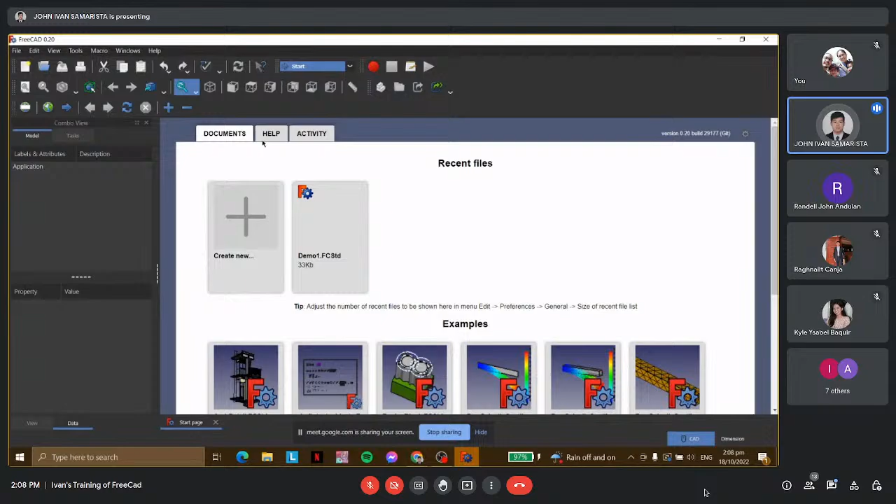So now, before we start designing 3D models in this software, we need to click this button, Create New. Again, click Create New. And since most of the time you will be dealing with designing objects, you need to select Part Design. But before diving into the details of Part Design, you need to know first the basic user interface of this 3D modeling software.

So the very first thing that you need to check upon opening FreeCAD is the workbench. As you can see here, there's a lot of things that you can do here, such as Draft, Drawing, Image, Part Design, Part Sketcher, TechDraw for your technical drawings, and many more. Most of the time you will be dealing with Part Design. Here in the workbench, we can select the active workbench that we will be using.

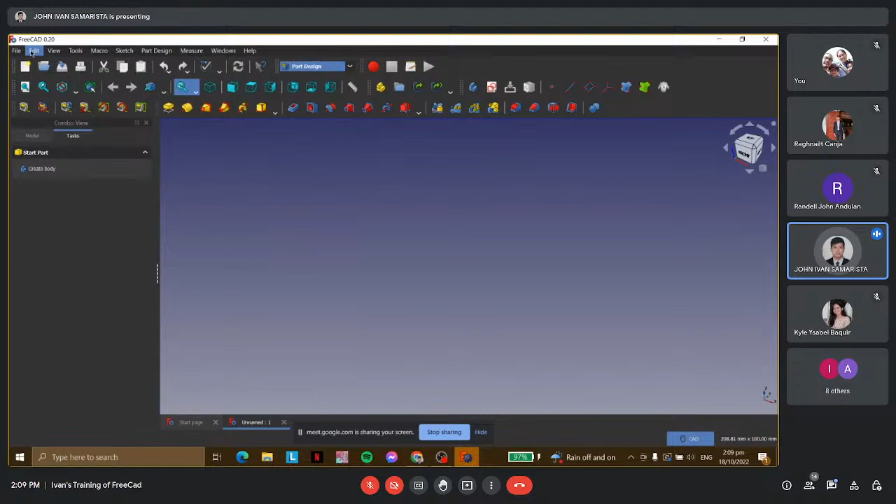So after the workbench, as you can see here, the very first part of the interface is the standard menu. Basically you can see here the File, the Edit, the View, and the Tools. So after the standard menu, we can see here...

Upon clicking this model, you can see here, this is the Combo View. Based on experience, Combo View is one of the most important parts of FreeCAD's interface because it really gives good guidance when you're designing an object. This is also known as the Tree View, which shows the hierarchy and construction history of objects in the document. Later you will see the hierarchy of the objects and their construction.

And next is the Property View. Here you can manually edit the tools that you utilize for an object. So in order for you to understand this Combo View better, I guess we need to sketch a very basic object.

So let's say I'm going to sketch a rectangle. We need to click first the Close and we need to Pad it. So now you can see here, as I've said earlier, the Combo View shows the hierarchy and construction history of an object.

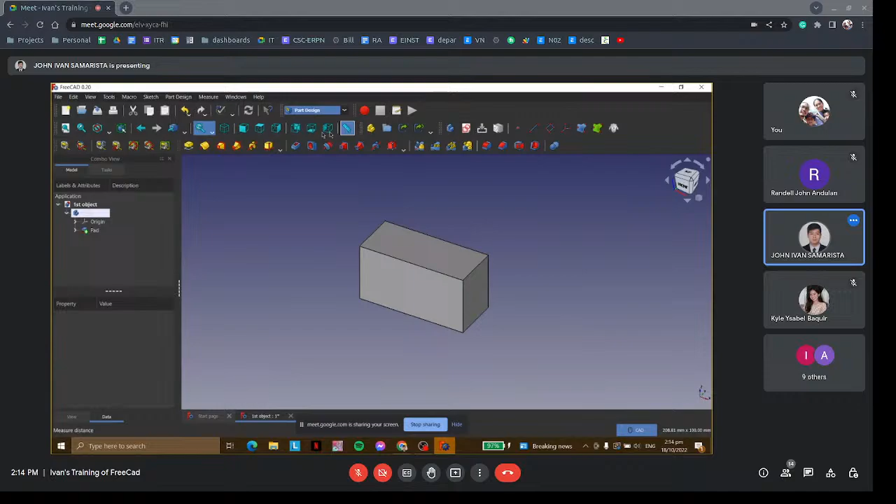But there's an alternative to that. You can go here to workbench and select one. Next is the toolbars. If you want to customize the toolbar, you just need to press this toolbar and check or uncheck the parts that you wanted to use. So let's say if you uncheck the structure, it vanishes.

If you want to get it back, just click it again. If you accidentally closed the combo view, let's say you click it accidentally, you just need to go to view again, then go to panels, and then select combo view.

Okay, so now after knowing those parts, we will be dealing with the navigation of FreeCAD. In terms of navigation, that means how do we rotate, pan, or zoom in and zoom out the object.

For you to know that, you just need to hover your mouse on this one, the CAD, and you can see the CAD navigation styles. In selecting a side of an object, you just need to use the left mouse button, and then for zoom, just scroll up and down.

For the rotate, you need to press first the middle mouse button, and you can select either of the two mouse buttons. And then for the pan, just click the middle mouse button. Again, for selecting, just select a side with the left mouse button. For zooming, just scroll up and down.

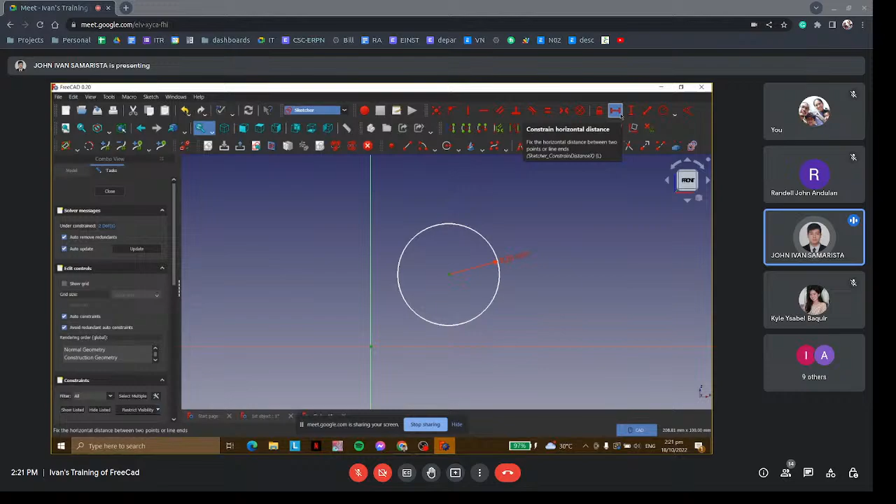So I can set a distance of, let's say, 30. Now we only have 1 degree of freedom. If we try to move the circle sideways, it can't be moved anymore. The only movement left is just up or down.

So the very last thing we need to do here is set a constrained vertical distance. It's basically the same thing as the constrained horizontal distance. You just need to click 2 points and then click this one, constrained vertical distance. Click these 2 points and then click the constrained vertical distance. Let's say we want this to be 30 as well.

As you can observe, the sketch turned into green. If your sketch turns green, that means it's already fully constrained.

Under the constraints here in the task, under the combo view, you can also see the constraints that we used. The very first thing we did was constrain the circle based on its radius. The second thing is we set a horizontal distance constraint, and the last one we used was the vertical distance constraint.

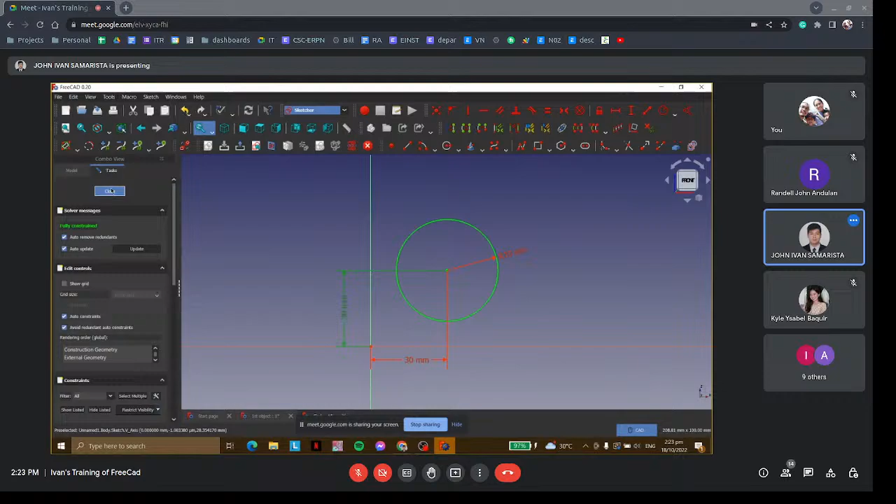Okay, so let's say you're done sketching. From here you can do anything, like you can press the Pad. Pad is just the extrude, like in SolidWorks, this is the extrude.

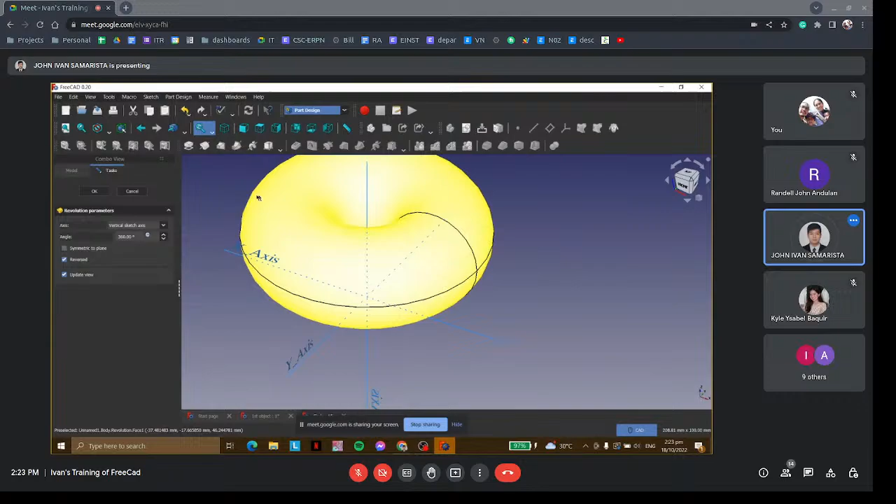And then you can also use this one, the revolution, which revolves around an axis. You can choose, let's say, the base x-axis, and then let's say we want this to be just 180 degrees. Let's say reverse. Okay.

So in this case, we'll just need to use the pad. And then okay.

So after dealing with circles, the next thing we will discuss is how to use lines. We create a new object again: create body, then click create sketch. We can choose any of these three predefined planes based on our object. In this case, I'm going to choose the XZ plane. For the line, we just need to use this tool, create line.

As you can see under the solver messages, the line is under constrained with 4 degrees of freedom. That means this point can move in two different ways - you can move it up or down, or sideways. And this point, the same thing, can also move up or sideways.

So in order to fully constrain this, the first thing we need to do is consider this origin point because we need to lock this first point. To do that, we select these 2 points, and then use this tool, constraint coincident - it creates a coincident constraint on the selected item. If I click this, the 2 points lock.

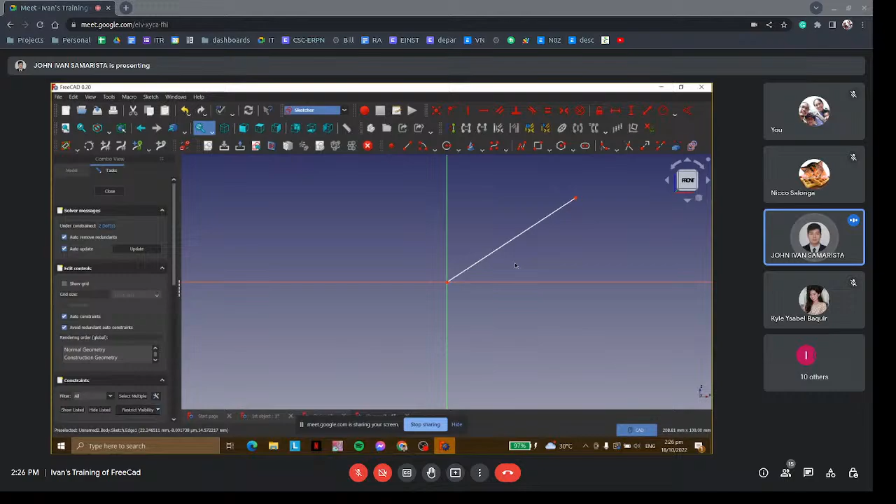So we have 2 degrees of freedom left. You can move this point like this. How do we remove the two remaining DOFs? Since we can move this up in vertical direction, we can set an angle between this line and this axis.

In order to do that, we select these two lines - press Control, the first line and our reference axis, this one. Then we click constrain angle. In this case, let's say we want 35 degrees.

As you can see, there's only 1 degree of freedom left. If we try to move this line, we can only move it in this way, because it's already locked at 35 degrees.

Since there's 1 degree of freedom left, what do we need to do for this to be fully constrained? Since we're able to move this like this, it's imperative for us to lock the dimension of this line. We use this constraint distance, which fixes the length of a line or the distance between a line and a vertex.

So we use constraint distance, select this line, and let's say we want 60 millimeters. As you can see, it's already fully constrained. Again, we can see here the three constraints we used: the coincident, the angle, and the distance constraint.

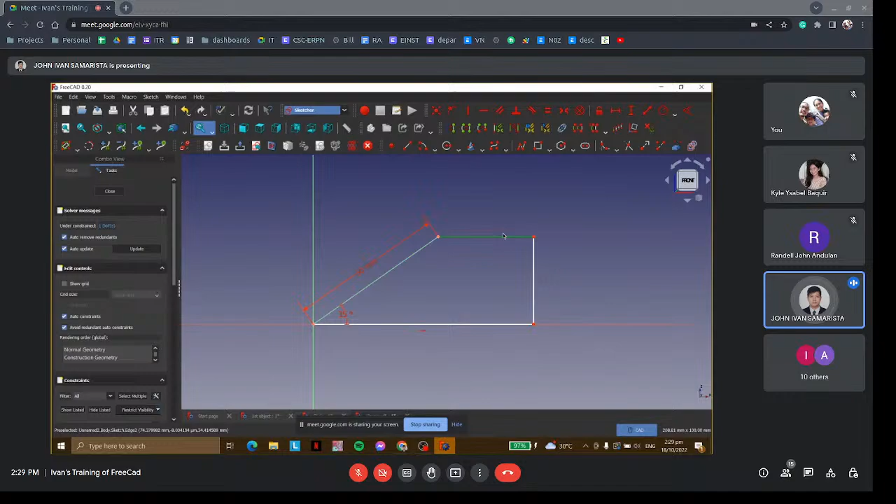In order to lock this, we need to specify a constraint distance for this line. We select constraint distance, and let's say we want a 40 millimeter length. As you can see, it's already fully constrained - if you move this sideways, it's locked at 40 millimeters, so you can't move the bottom line anymore.

If you're done sketching, just close, and then you can use whatever tools to pad this. We need to label this as the line. Now we're done with the lines.

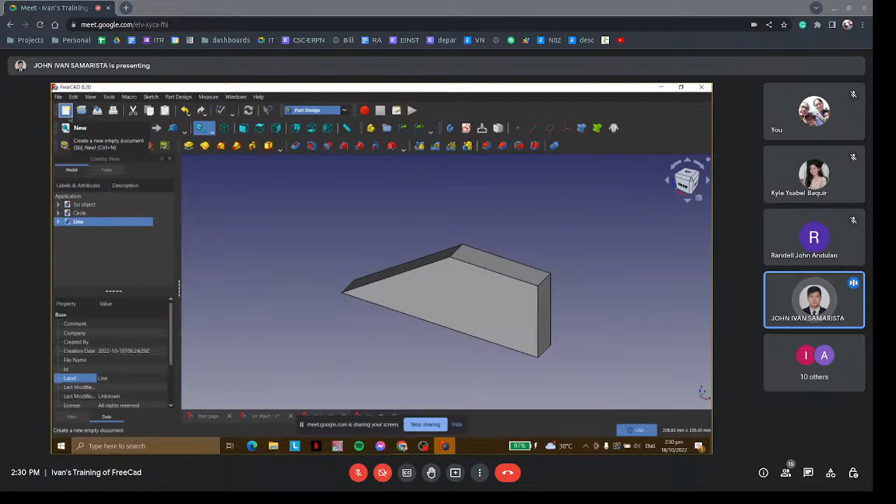So let's go to rectangles. Again, we need to create a new file. We just select new, and under that select create body, and then same process, we create sketch.

Now for this one, I'll be selecting the XY plane. Again, it depends on your preference, or it depends on your object. So let's say we have a rectangle here.

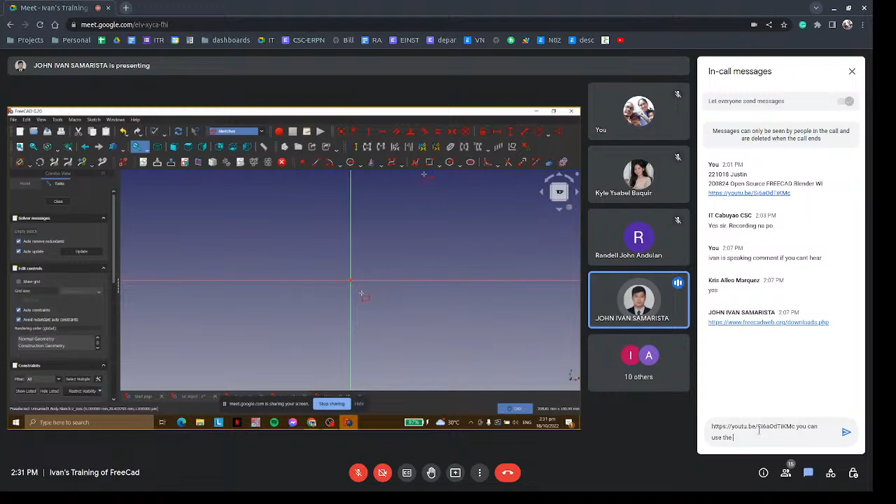As you can observe, the theoretical center of this rectangle and the origin are not coincident. So another constraint we can use is the constraint symmetrical.

So in this case, the constraint symmetrical, as stated, creates a symmetry constraint between two points with respect to a line or a third point. In this case, we will be utilizing the third point.

We just need to select first the two points, this one and then this one. Our third point, or reference point, is the origin. If we click this, the constraint symmetrical, now the center of the rectangle is already coincident with the origin.

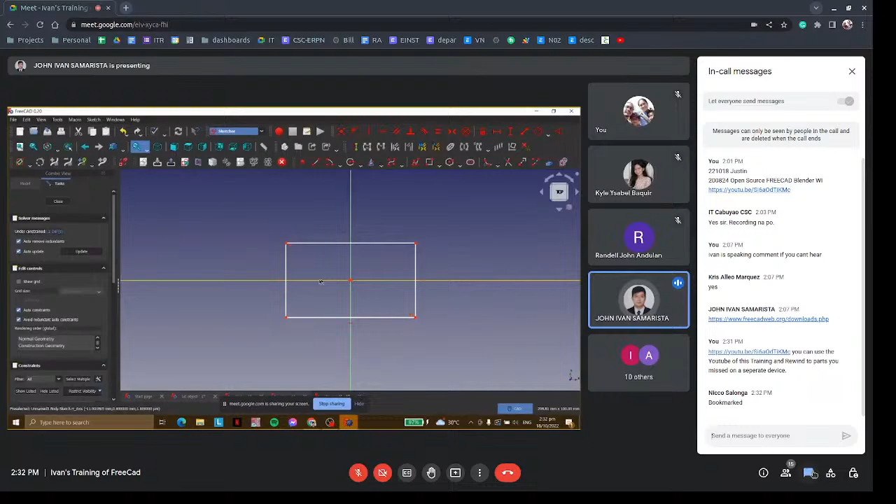Now as you can see, this rectangle has 2 degrees of freedom, so it's really up to you. If you just need a rectangle, you can basically close the sketch. But if you want this to be fully constrained, like transformed into a square, we need to fully constrain this.

As you can see, we can move this vertically and sideways. So in order for us to eliminate the degrees of freedom, we can select two lines.

After selecting two lines, we can use the constraint equal. This is also an important constraint because it creates an equality constraint between two lines, or between circles and arcs. If I click this, these two lines that I've selected now share the same length.

That applies to the remaining lines as well. As you can see, it's now only under-constrained with 1 degree of freedom. That's the overall size of our square.

For us to fully remove the degrees of freedom here, we just need to specify a distance or dimension. Let's say we want this to be 60. Then that's it, it's already fully constrained since it turned into green.

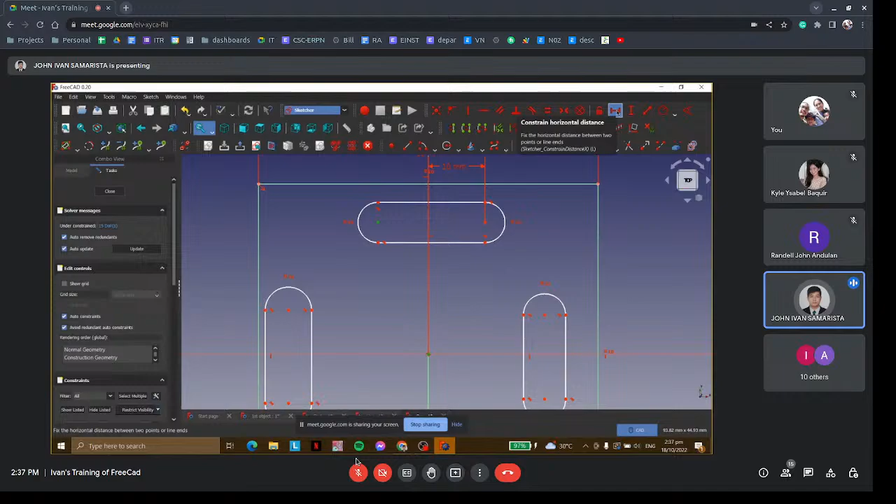If I select these two points and then select the constraint horizontal distance, let's say we want this to be 10 millimeters, so it's already constrained at 10 millimeters. It becomes 15. On the other side, we also want this to be 10 millimeters, so we just click again the constraint horizontal distance and set it to 10 millimeters.

Next, we need to set a constraint vertical distance. You can select any of these two points with reference to the origin. We just click this one and this one, and set a vertical distance of, let's say, 25.

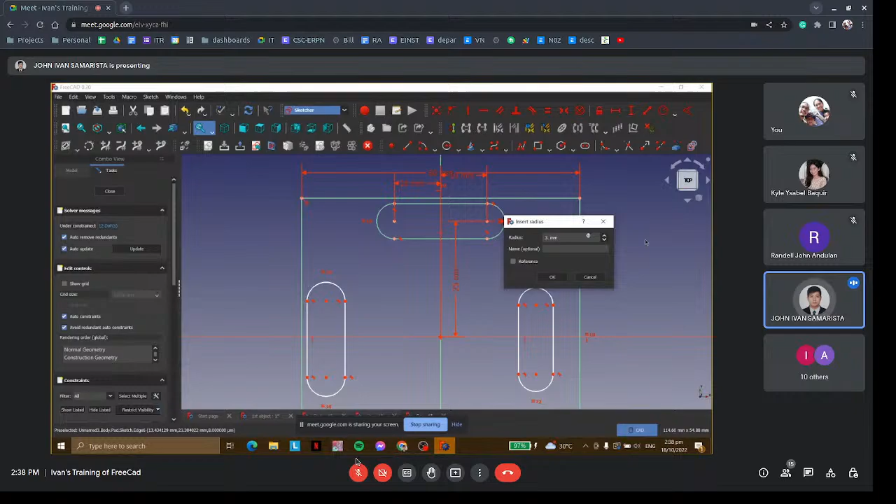Okay, lastly we need to constrain the radius. As you can observe, the movement of this slot is just based on the radius, so we can't move this vertically or sideways anymore. We just need to constrain the radius with 3.5 millimeters. Okay, and then it turned green, meaning this slot is already fully constrained.

So let's apply each step we've done here to each of the slots. We need to click this one and then this one, and set a horizontal distance constraint again with a length of 25. Then we need to constrain it vertically based on the origin with a length of 10, and on the other side it's also 10.

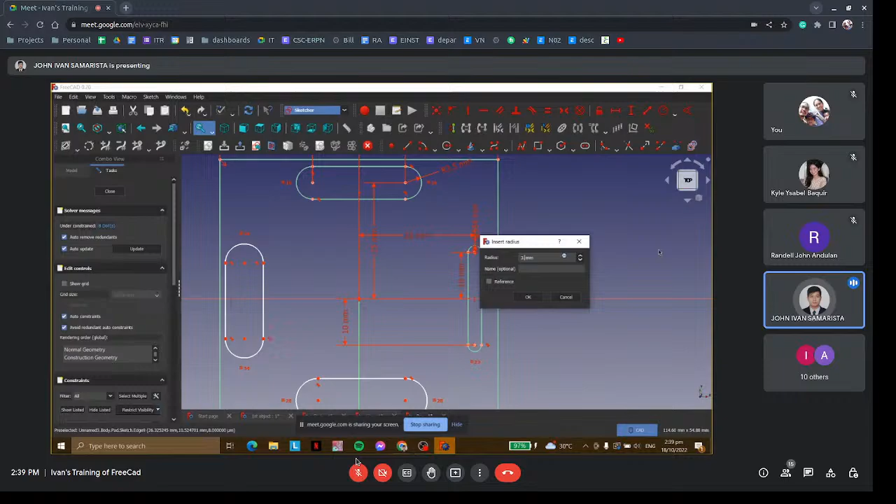Lastly, for the radius, we just need to make this 3.5 millimeters. Okay, for the last two, now we have 8 degrees of freedom left. Same thing: set a horizontal distance of 10, and on the other side it's 10 as well. Next, we need to constrain it vertically. Again, you can select any of these 2 points. We want this to be 25. Then lastly, we need to adjust the radius to 3.5 millimeters.

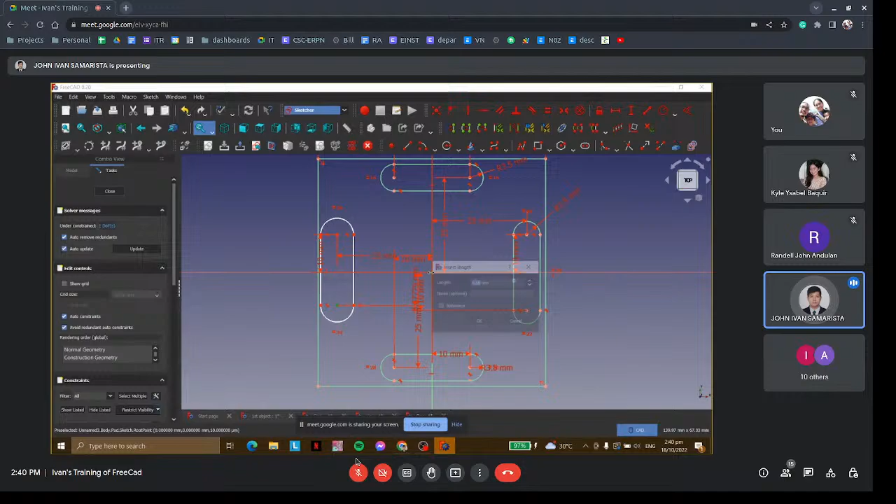Now we have 4 degrees of freedom left, so same process. We can constrain this horizontally, 25. We can constrain it vertically with 10 millimeters, and this one also 10 millimeters. Then constrain the radius of 3.5.

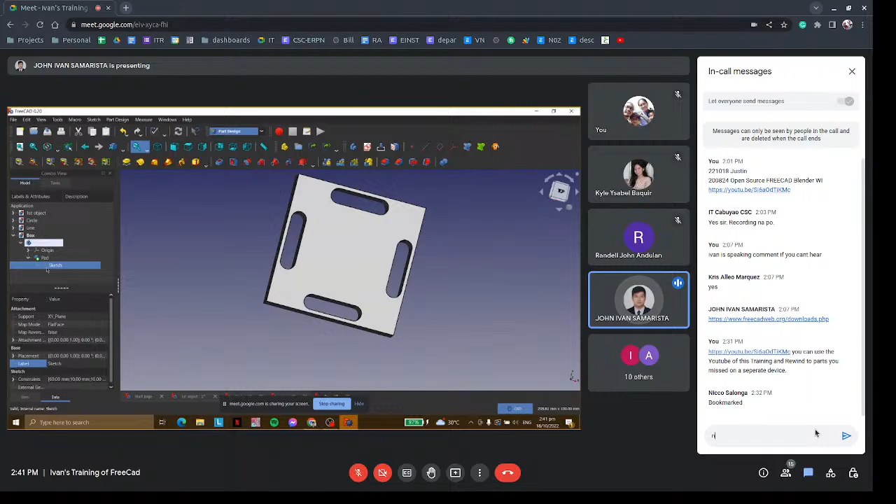Now it's quite apparent that the whole sketch is already fully constrained, so we can close this. We've already padded this earlier, so it's already our object. In case you want to add additional elements to your sketch, you just need to go into the combo view and double click this one. Let's say we want to add a hexagon here.

You can see from the sketch that this hexagon has 2 degrees of freedom. Those 2 degrees of freedom would be its rotation, meaning it's not yet fixed, and its diameter. So we can lock this based on our preferred design. In this case, we want this line to be horizontally constrained, so now we have 1 degree of freedom left.

Then we can adjust the size by using the constraint radius again. Let's say we want a radius of 10. Then close.

Okay, in case you want to add more elements, let's say you want to fillet or chamfer the corners, you just need to select. You can do this two ways: first, select all the sides you want and then click the tool, or you can click one side. Let's say you want this to be a fillet, and then we can add more sides. This one again, I'm pressing Control and selecting all of the sides, and then this one, and we want this to be, let's say, 8 millimeters.

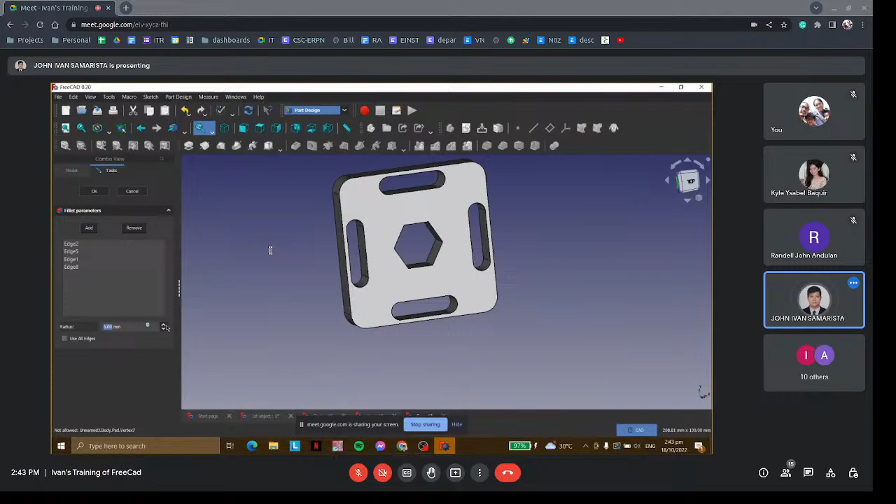Okay, so that's basically it for this exercise.

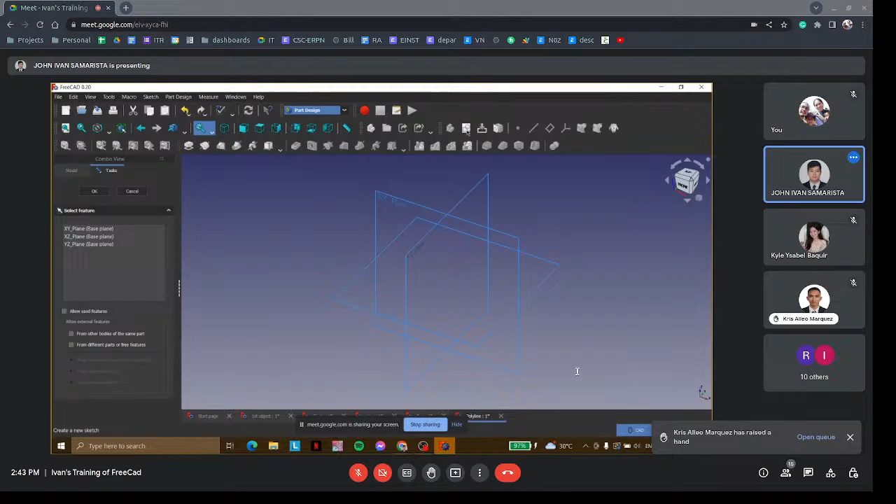So the last thing I want to discuss in the basic sketch of FreeCAD is the polylines. Again, we need to create a new file. We need to label this with polyline, then create a body, and then create a sketch. In this case, I will be choosing the XZ plane.

We can use polyline if we want. Using polyline is far better than using the create line tool, because with polyline we can work faster, and we can also use it if we're dealing with objects with variable shapes. It creates a polyline in the sketch, and we press the M key to change the cycle behavior. So we need to select this one and then create a series of lines.

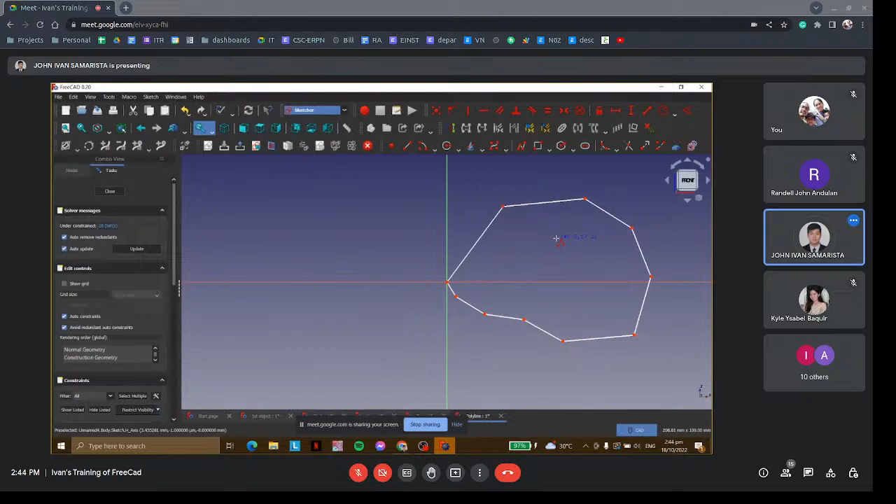It really depends on the object we're working on. Let me delete this one first. Again, there's a shortcut here: it says we need to press M to change the line behavior.

Let's try to make something out of this polyline. So we need to create a line again, and if I press M for the first time, it changes. M for the second time, changes again. M for the third time becomes an arc. So in this case, I'll be using an arc.

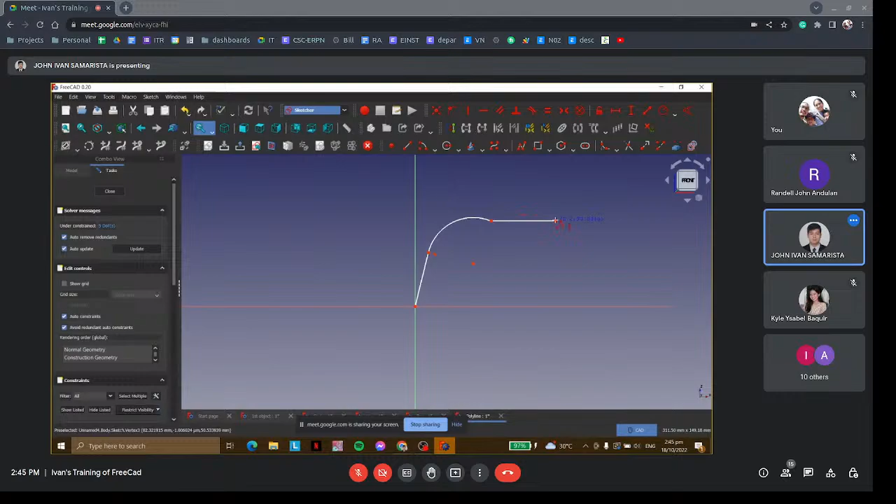Then I want a horizontal line here, and let's say I want another arc again, so I need to press M 3 times. Okay, this is another arc. Then I want another arc, so we press M again 3 times.

Then we want another arc again, we press M three times again. Okay, and then let's say we want just a simple line. And then we want another arc. And then lastly, we close this with an arc as well. So let's say here's our object.

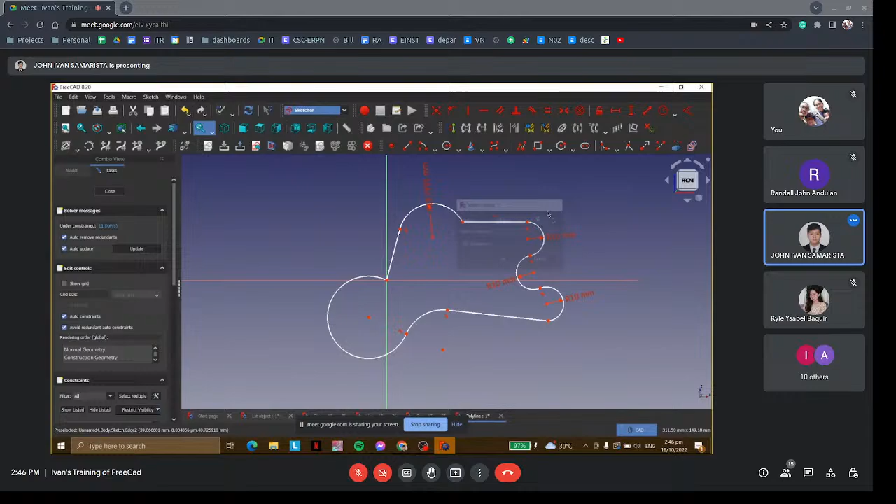So it's really up to you if we want to remove all of the constraints. It really depends on the object that you're working on. So here, let's say we want to adjust the radius. We want this to be 10. We want this to be 10 as well. 10. We want this to be 10.

So after that, we can apply the other constraints that we've discussed a while ago. In case you want this line to be vertically constrained, you just need to click this one and then use this constraint vertical. Let's say if you want this line to be horizontally constrained, you just need to click this one to constrain horizontal. And then FreeCAD will automatically adjust based on the constraints that you've already set.

So yeah, that's pretty much it for this exercise, for this lesson.

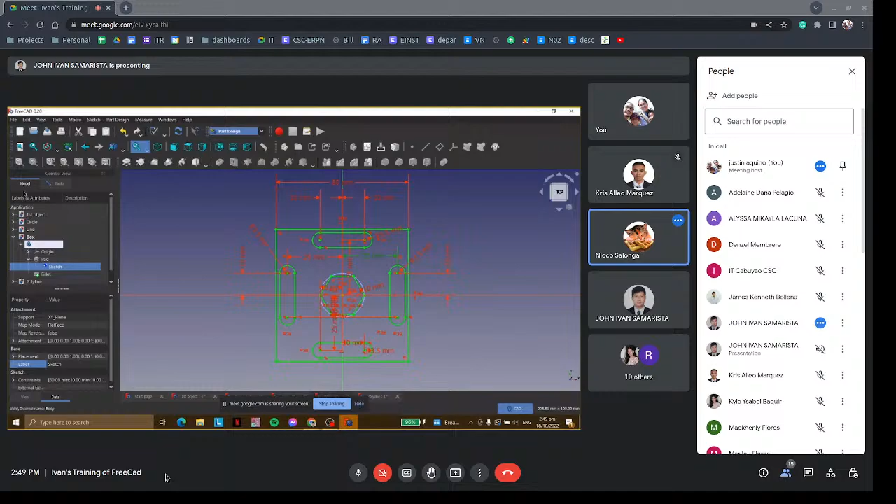In the model, I think, model. Combo view, model. Upper left in the model part. Okay, if in your model view, the, where's that? Upper left. The model tab. Okay, line labels and attributes. But there's above that, there's model, and tasks. Oh yeah, that's the one, right? Yeah.

And you're in the sketch mode. Are you in the sketch mode? Yeah, he's in sketch mode. Yes sir, naka-red kasi eh. Naka-red at green, sketch mode. You should see the, okay. Go into the part where you can draw again.

You'll see the sketch has the constraints listed on the left. Oh, the task sir, this one. Yeah, yeah, yeah, there, dun pala sa tasks. Yeah, you can actually unclick those. They'll just be hidden, yung check mark to the left. Yeah. Oh yes sir. Okay, I remember now, parang di, I mean, if it's just too cluttered.

Tapos, there's a way to link, like, di ba, measurements to each other. Yes sir, para the same na lang siya. You don't have to anymore keep re-encoding. Is that an array function, or is that something else you can do within? It's not the same as array. Array would still be better, but basically, if you change one measurement sa isa, lahat sila magbabago because they're using the same, let's say, length of line.

You can set it up there. Yeah, you can link constraints. Sige, it's a type of constraint. Where's that? No, it's in the constraints. It's a type, it has to be already built in when you make the constraints. So you go to the constraints. Can you right click on it for more options?

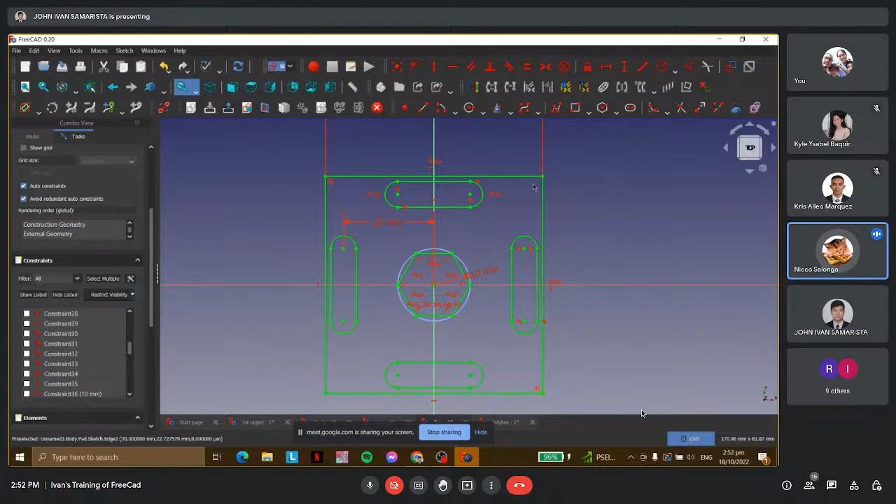So you can hide them all. Sorry, first you constrain them so that they're linked. Then you hide them, 'cause that way it's not messy. You won't, the only thing that remains are your main control constraints. Because if you change this constraint, it will affect all the other constraints anyway. And since you set it up properly, yeah, if you set it up properly, and since it's hidden, it won't be visually confusing. Mhm, okay.

If you're using a lot of the same shape and they're not going to be different from each other, it might be good to use the equal constraint. We can try that on the next session.

Ivan, just save this file, and then on the next session on Friday we can have a demonstration of the equal constraint.

It doesn't have to be now. You have an exercise prepared, right? Yes sir, wait, I kind of dropped off. Did you demonstrate how to import an image, the floor plans? That's on the next session, sir. Okay, okay, sure.

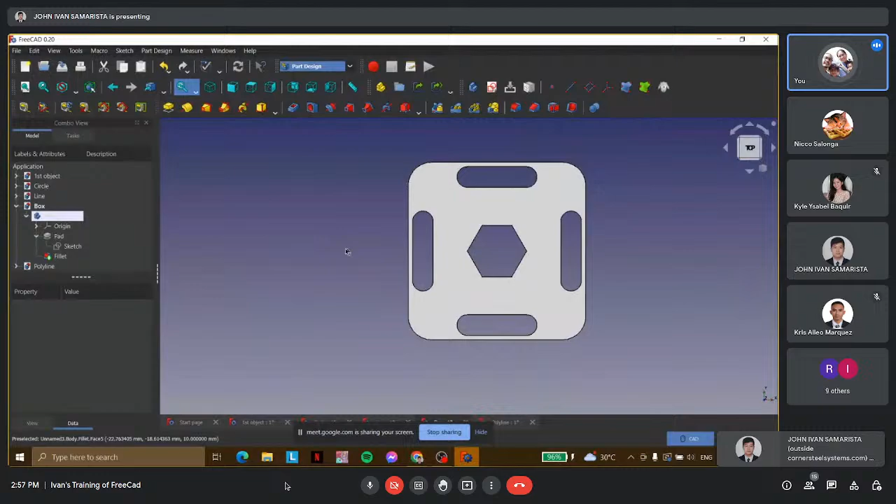Can someone volunteer to share their screen and replicate this? For this one, the dimensions don't have to be exact as long as the appearance looks the same. The very important thing is that you apply all the constraints.

Ivan, I think this is a good idea. Would someone volunteer to show their screen and do it part of the way, like constrain one corner? There's four corners.

So one person can do it up to that corner, and then the next person can share their screen and show the other corners until you have four or so, so that way you don't wait for us. One guy already did it up to this point, the other person already did that and proceeded to the second set of constraints, another is on the third set, and the other is into the fourth set.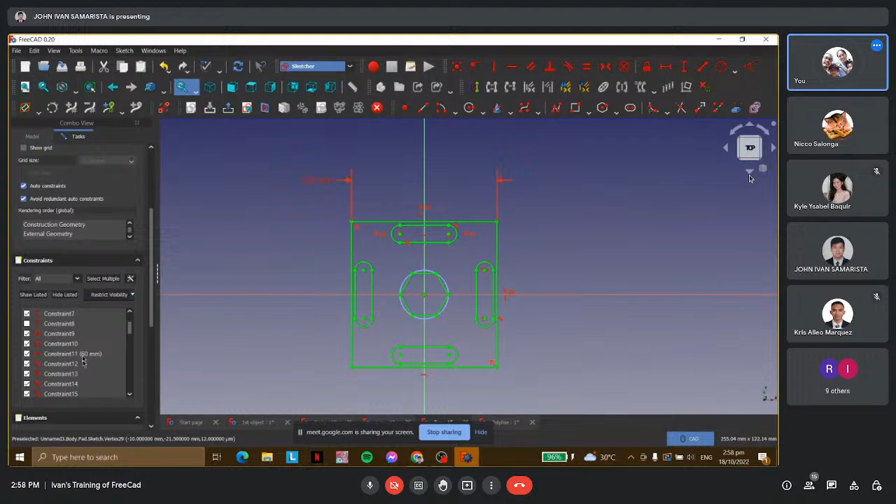And of course, the final one being the hexagon. Thus you have demonstrated everybody has understood the concept. Is that okay? Okay sir.

Who'll volunteer to be first? The advantage of being first is that we're here to walk you through, or Ivan's here to walk you through. If you forgot something, there's people to walk you through.

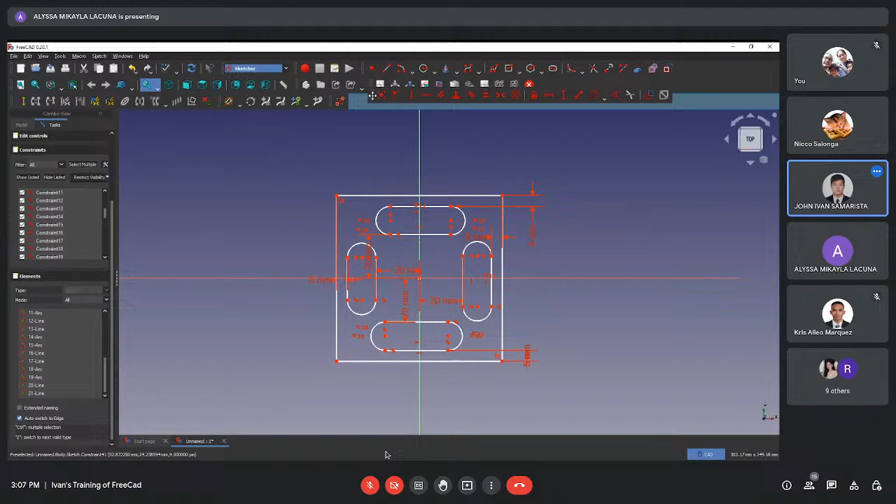You want to find the radius? You just need to move that somewhere else. Which one? That one, that one, this one, you can transfer that there. Then you can use the constraint radius or diameter.

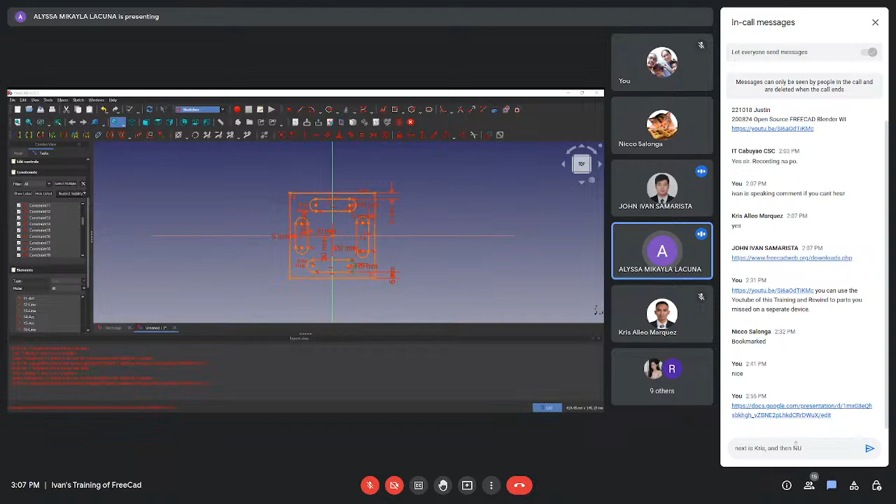So they're all 5 now. Yeah, like, I think it defaulted to 5 earlier, so I'll try to make it 6 instead. Never mind.

I guess the next thing would be its horizontal distance, like between the two center points of the circles, this one and this one.

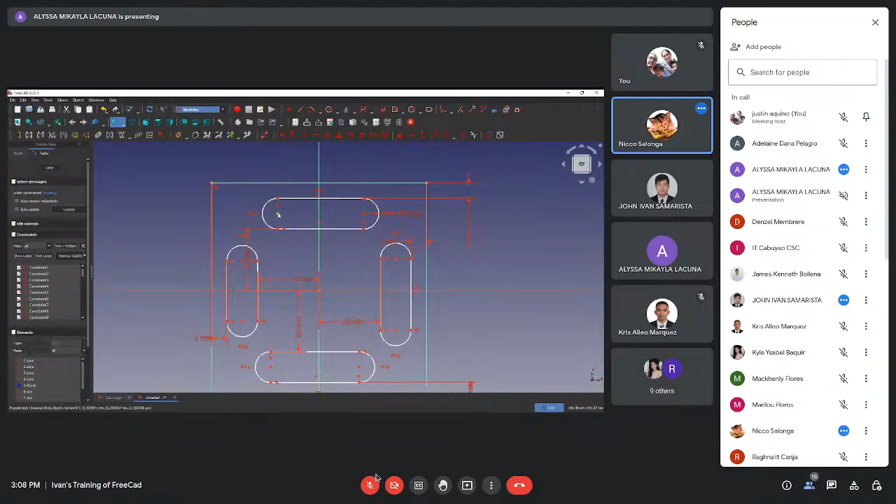Use this one first, then you can reference it to the origin, then use the horizontal constraint. Select that one and the origin, then select the horizontal constraint, that one. Then make sure both sides have the same length. Then the process is pretty much the same for the rest.

Yeah, that's fully constrained already. So you can add whatever you like in the middle.

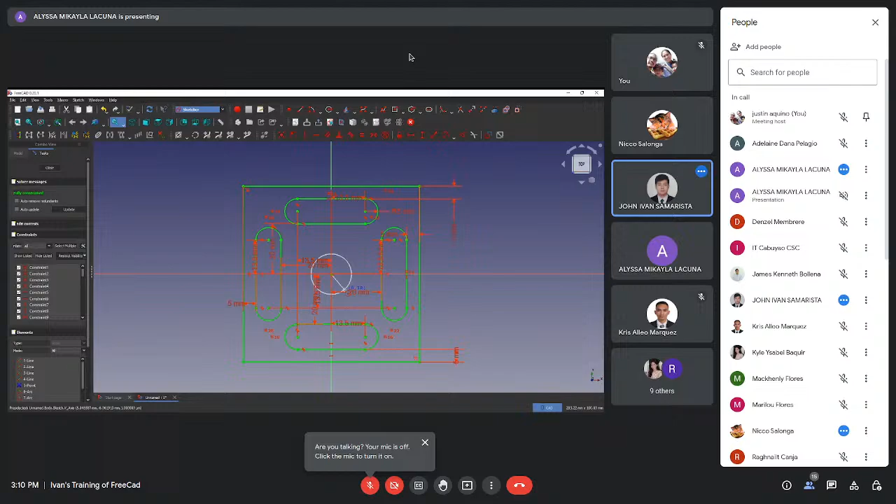And then if you're done sketching, you can just click close and then you can add it. And then, yeah, that's it.

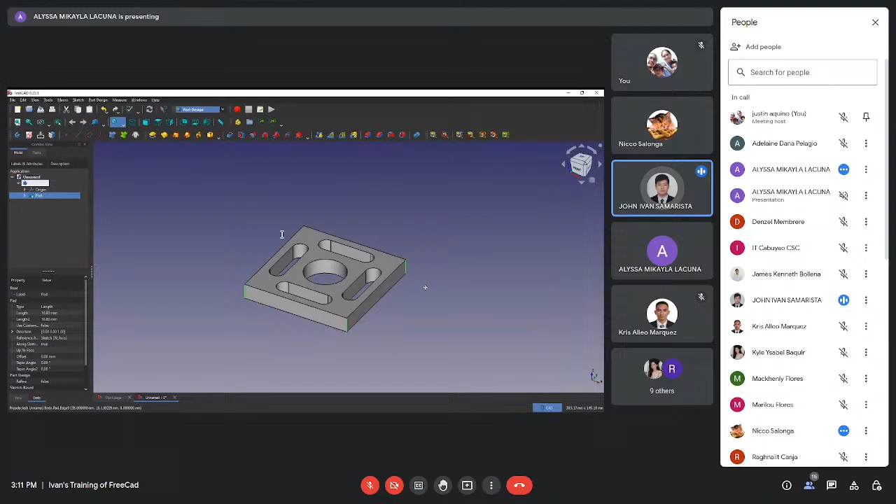Sir? I think... Okay, try it. I'll stop sharing now, sir. Okay, fine. Thank you. Thank you, Alyssa. Thank you. Sir, wait, just setting up.

Hello sir, I guess for the second exercise, I think it would be better if it's take home. They can utilize polylines and create any object that they want, and then they can present it next meeting.

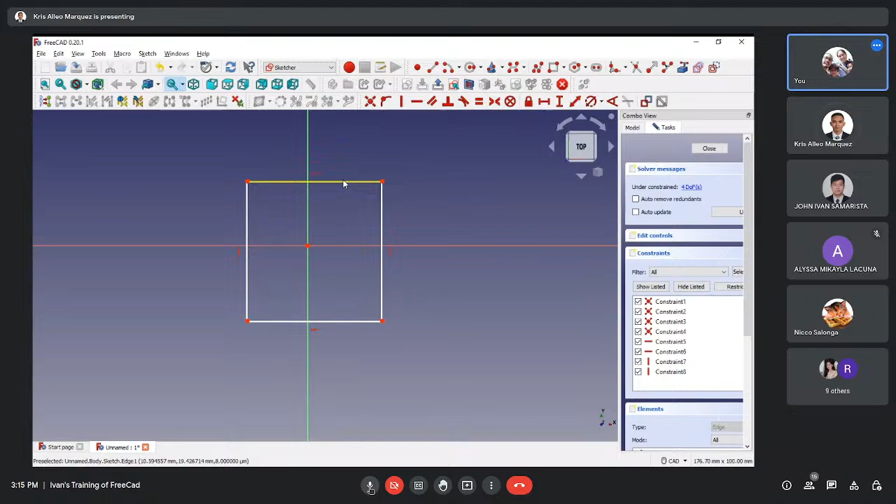Yeah, actually, as long as you demonstrate the understanding of constraints. The reason why the rounded one was used is so you can demonstrate how to use the radius constraints.

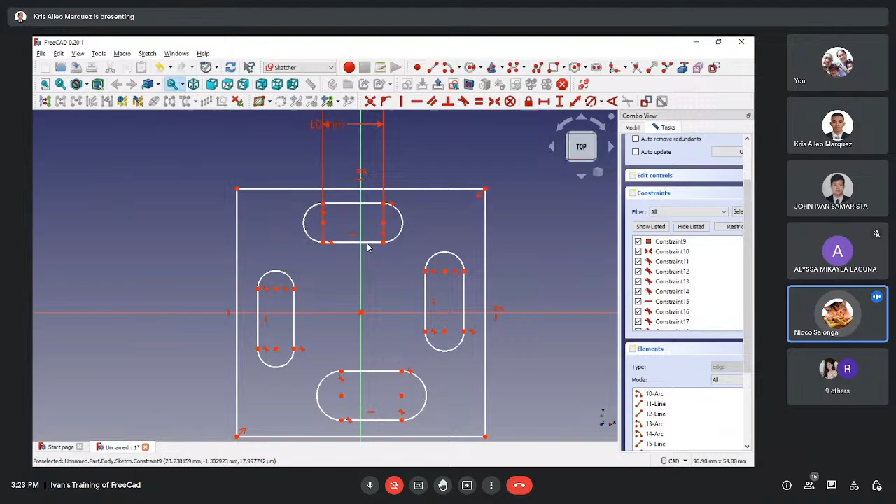Additions. Yung equal, parang ano nang yata siya. Parang yung mga numbers dun, yun yung designation lang ng number ng constraint. Sir, parang ano, hindi siya yung measurement. Hindi siya 15 measurement, siya constraint number 15 siya. Yes sir, number lang po yung order.

Hindi pala pwede yun, so since meron na akong measurement. Dahil nga, yan mo, yan. Pwedeng equals, equals, so sila yan, equal. Dahil nga, yung numbers nila, ano lang pala yan. Yung designation lang ng constraint, hindi siya measurement, yung nga pala.

So kung 47 yung isa, 48 yung isa, 40, yung parang ganun. Mag-aano lang siya, by the numbers lang.

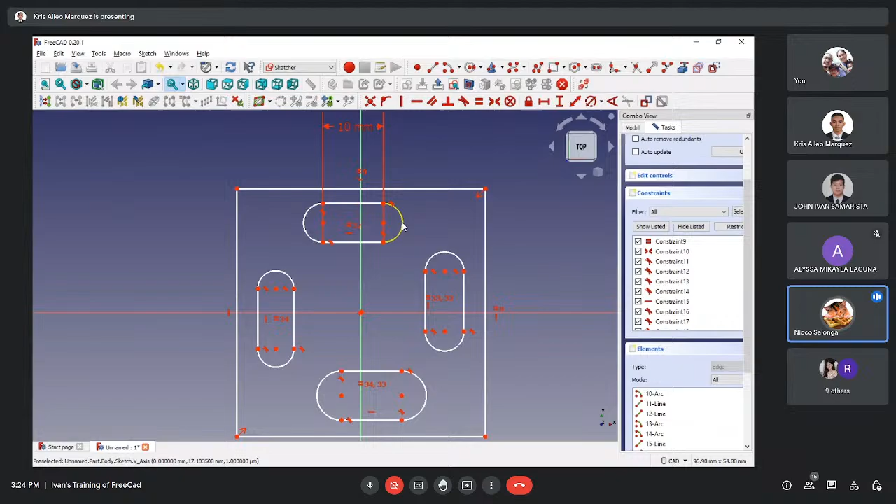In other words, dapat hindi na lang dapat pinabayaan na lang pala. Kaya nga sir, parang ano, designation nga lang siya kung saan equal. Oo, kung saan siya nakatutok. So bakit ayaw? Constraint radius.

Sir, patulong ulit, how to, click, tapos click radius mo yung isang curve. Ito? Hindi sir, yung sa kabila, yung sa isang shape. Yung kabilang shape. Ito sir? O, hindi, ito? Yan, yan, yeah, tapos, iyan mo.

Equal, arc, equal, yeah equal, pwedeng equal din. Hindi sir, wala pa kasi arc akong pala. Constraint distance nito yung arc distance. Gusto mong yan, no? Arc distance para, yan, equal, isa nga lang yan, sila arc lahat, distance mo muna. Bale sir, ayaw, hindi, arc.

Yung below, constraint radius, yung below. Ito? Yung katabi ng ito, angle. Yeah, so, 3.5. And then, yan, horizontal, para hindi siya mag-ano. Yan. Equal, okay.

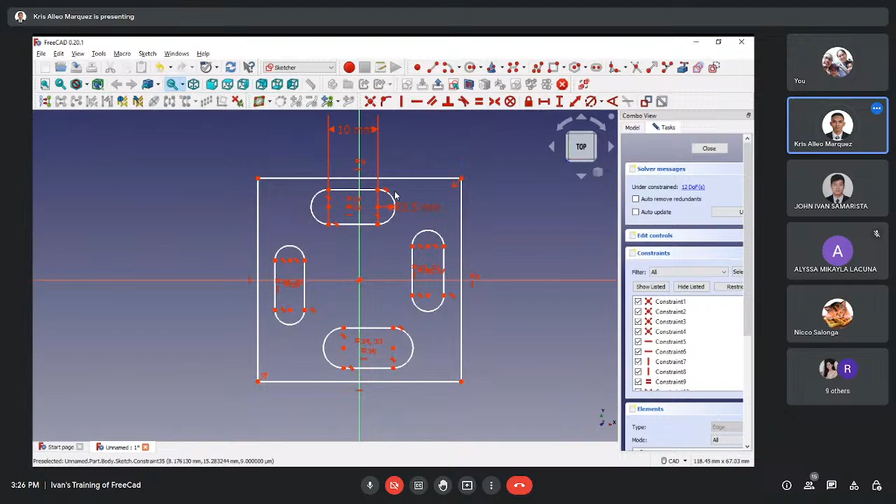Ay, tapos so yan, 3.5, i-equal mo dyan yung mga arc nila. Kahit ano lang, yung sa ibang shape lang. Ano na po yun, so bali actually, isang yung arc ginawa ko lang, tig-isa lang per shape. One per lumang slot siya.

Try ko rin sa one per shape. Gano'n naman siya, and then equal. Oh, what happened? May isang hindi naka-horizontal, vertical. Yeah, this one. Control Z. Nagano ba? Mas-select mo pa. Yan, okay, meron yung mga hindi rin naka-horizontal. Mas malaki yung isa, and then okay.

Ano po yung nangyayari pag nag-orange? Auto remove redundants, pag nag-orange. Opo, kanina usually nakaset siya. Sure. Meaning, I think sir, po yun, redundant constraint, parang nadodoble siya. Okay, parang may naiipit. Yes sir.

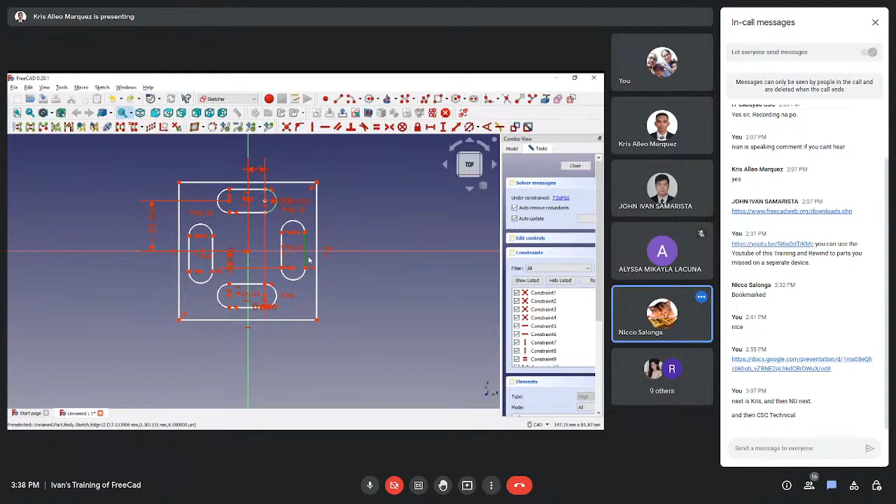Parang hindi na-apply. Yan, okay. And then, ano itong line na to? Okay, yan, measurement. Yep. Wala.

Okay, so itong line na to. And then, ito, sir, no? And then, horizontal constraint. 0.

That should be vertical. Vertical. So, 0. Okay, and then, equal na ba siya?

But, ano to, ba't hindi pantay pa rin? Wait lang. Parang may kulang, hindi ko kasi sure na siya nagpantay dito. And then dito okay. So ang hindi po kasi pantay natin is itong ating square. Okay, so hindi siya okay.

And then naka-constrain sir sa center yung isa. Naka-constrain pala to sa... So, saan? Hindi... galaw-galawin mo yung mga parts. May gagalaw dyan. Oh, yan, so yan yung hindi naka-constrain.

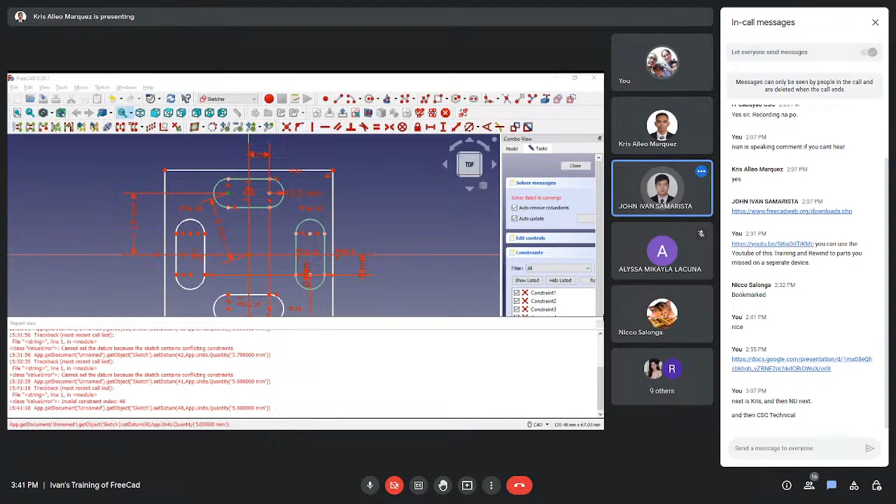Oh, so yung ano dapat, horizontal constraint. Okay, so, and this horizontal, so 5. Na naman. Okay, gumagalaw pa rin siya. Hindi naka... Ito, sir, mga naka-fix na ito mga greens, no? Yeah, naka-green fix na yan. So, bali, hindi na magagalaw yan unless...

Pero lang specific... Sir, wala pa po yatang horizontal distance constraint. Dapat, along, so, with reference sa origin. Measurement, yan naman lang, parang ginawa mo sa isa. Diba? Ito, sir, parang i-equal ko dito. I-zero ko din ito. Hindi mo na magalaw na up and down, di ba?

Opo, I guess yung sir, yung 15 millimeters. So yung 15 millimeters, so, yun nga, i-ano mo. Parang yung ginawa mo sa dalawa. I-ano mo yung measurement nila sa center or something. Yeah, 15, and then that was, lock na siya. Ayun, okay na, tapos din yun isa. Tapos malapit na yan. Yan, fully constrained, tapos set na lahat. Yung na lang.

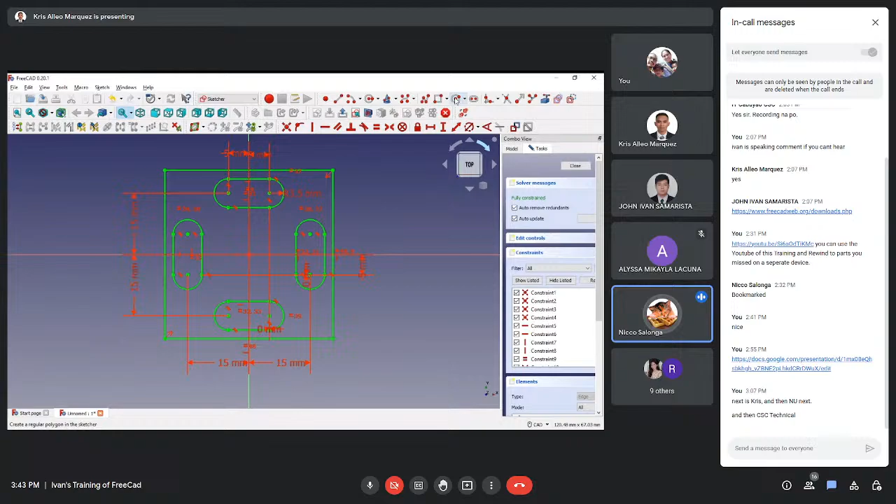So yan, uy, dalawa. Delete mo lang, yan, okay. Then, let's see horizontally. Tapos center, so, radius, sir? Radius, tapos i-set mo lang sa center. Sir, just click mo lang dito.

Ito? Yeah, then radius constraint. And then, radius constraint. Yep, yan. Okay. Tapos, nakaset na siya? Yes, sir. Fully constrained na siya. Then close. All good. And then close.

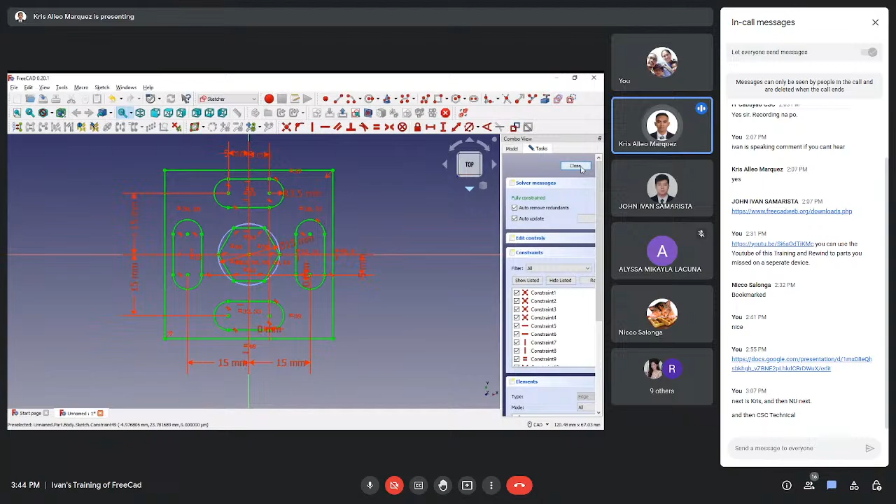And then... Tapos yan naman na lang. And it's a shape. Paano nga sir mag-ano nito?

Mag-move in sir, itapat mo yung mouse button dun sa baba, sa lower right. Dito? Dun sa CAD. Di ba parang pinaka lower right? Yung CAD. Ito? Itapat mo lang, no, yung CAD. Yeah, dito? May lalabas dyan. So,

Okay, and then, okay, yeah, so bale, i-chamfer, sir, no? Yes, sir. And then, hindi pa yata sir na-click yung okay kanina dun sa ano, sa okay. Padding, yan, yeah, okay. And then, and then, use a chamfer. Right, ito pa yun, right. Groove, right pa, ito. Okay. Pili, yeah.

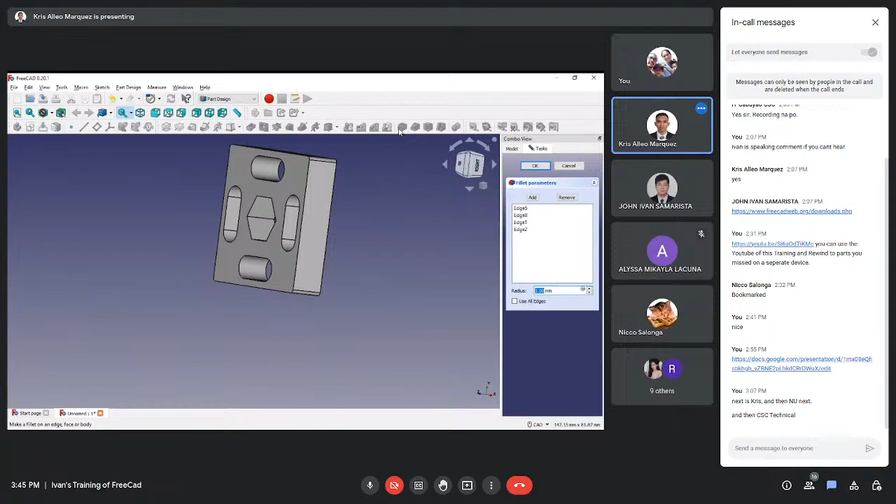And then sir, adjust na lang yung radius sa right side. Combo. Just, hey. Sir, thank you, sir.

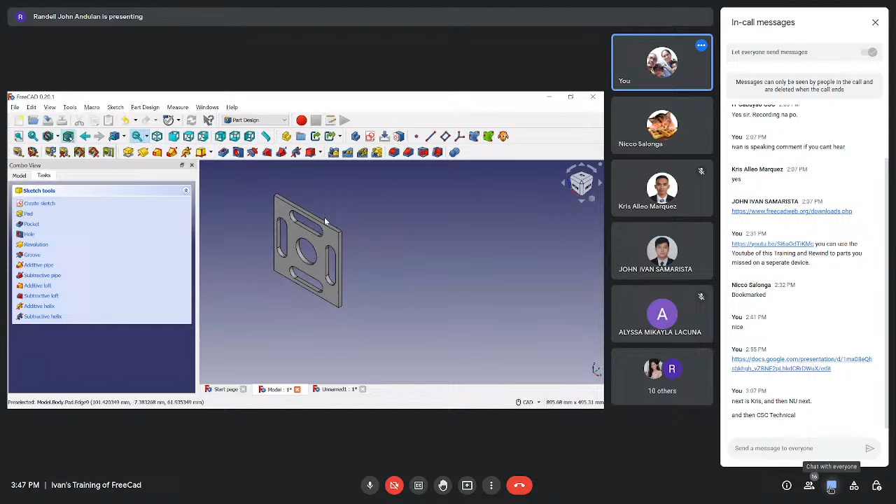Sige, sige. Okay, organize mo muna yung GUI mo, baka hindi nakakita lahat eh. Wait, wag muna Sketcher, start ka muna. Punta ka sa workbench, Sketcher. Click mo yung Sketcher, pili ka muna ng part design. Sige. Ayun, yun.

Create sketch, sige. Then pili mo yung okay. And sige, before you start drawing, ano mo muna? I-drag mo muna yung mga panels mo para makita. So yung mga tatlong dots yan, kasi paminsan nakatago yung mga ibang controls eh. Ayun, para makita.

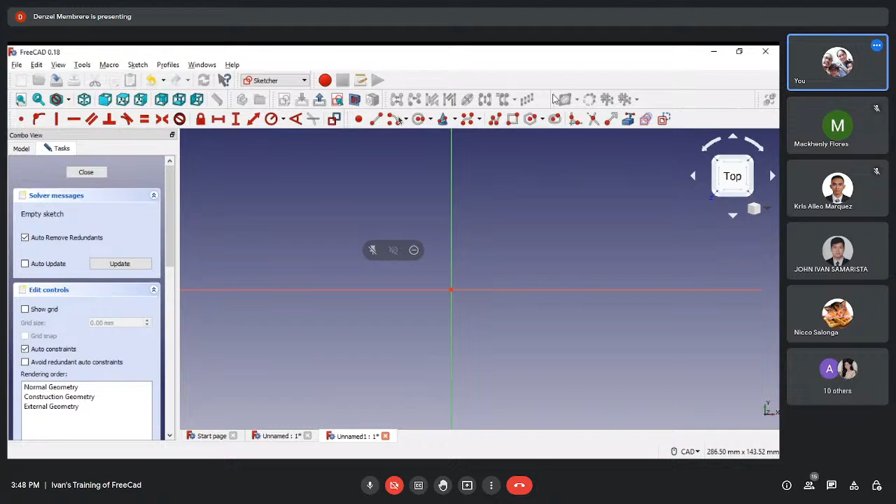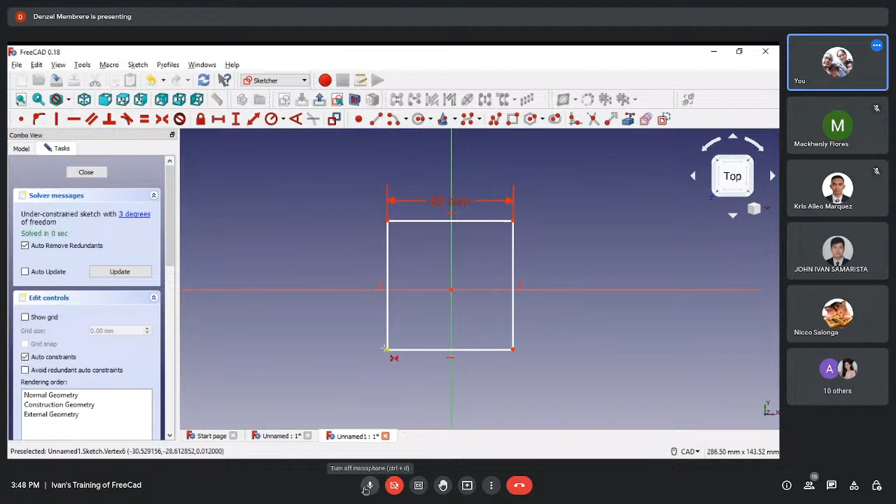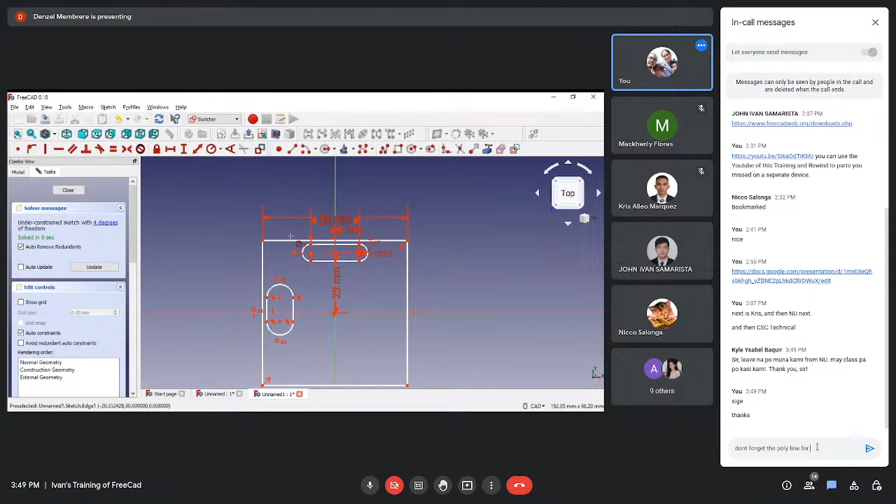Okay, sige. So box. Yeah, okay yan. Ayun. Okay, sure. Sige. Tsaka dapat horizontal. Ayun.

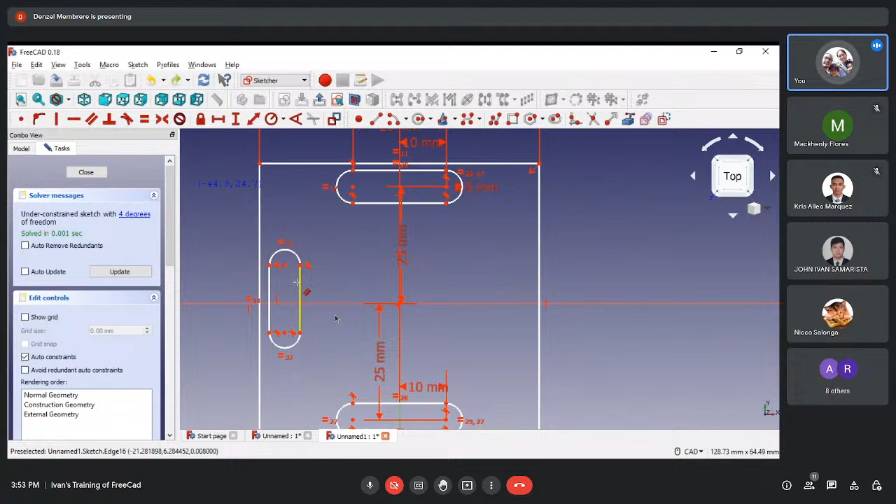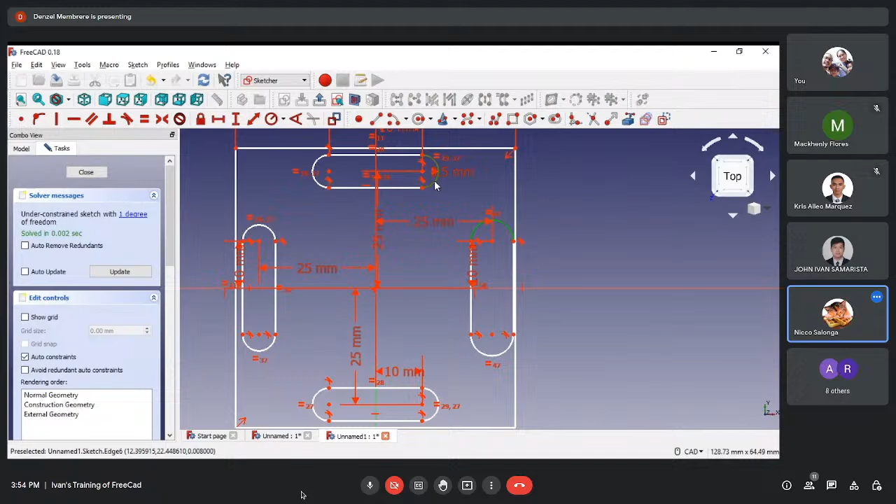Um, I think, sir, better kung select muna yung two sides before clicking yung sa tools. Yeah, that's good, sir. Then,